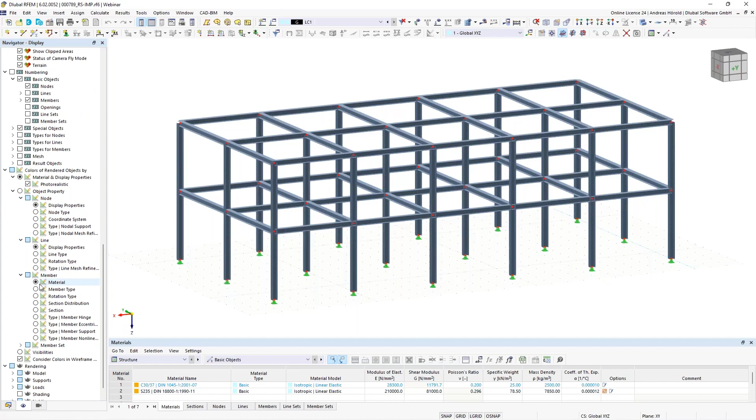We would like to display the members with different colors. I can show you the navigator display. You can use different settings here, for example the members according to member type and so on, section, and you can see there's the same color for all the same cross sections.

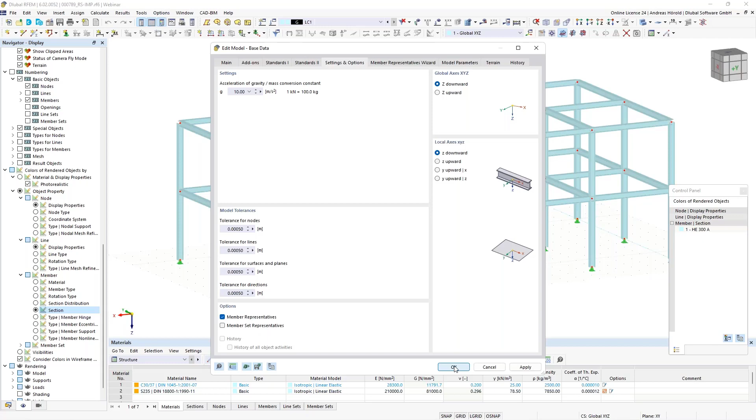I would like to show you two possibilities to show the columns and longitudinal beams and so on with different colors. At first, I start here left above with the base data, and I go to settings and options and activate the member representatives. Now you can see the different member representatives, for instance the cross beams, the longitudinal beams, and the columns.

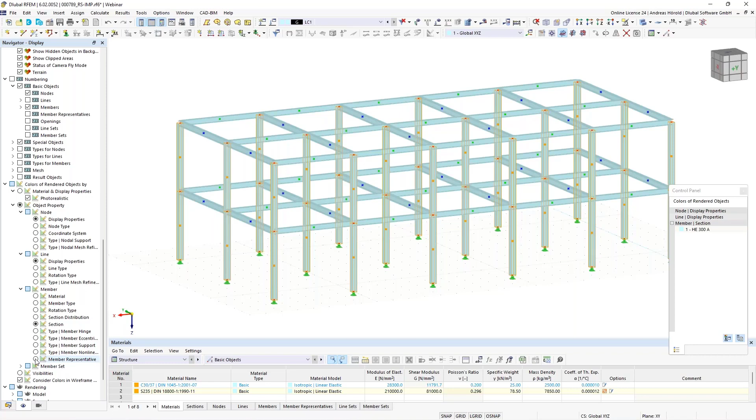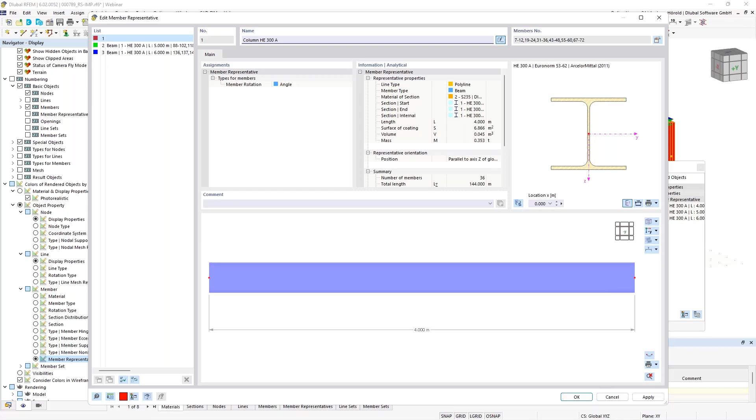You can select them here in the navigator display on the left side, member representatives, and now we have the columns and so on with different colors. It's also possible to rename them. If I click on such a member representative, I can edit the name here. For example, I call it column HE300A. And I could do that for all.

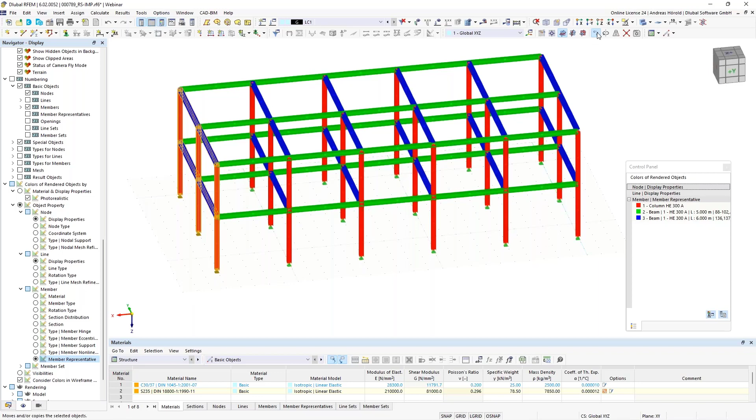So that's one possibility, but the disadvantage is it works now because all the members have different lengths. But for example, when I select those here and move them 1 meter in the X direction, then you can see those members have the same length, and that's why that option doesn't work anymore. I switch off the member representatives. I can also deselect it here, member representative, when the dots are also undisplayed.

So next possibility: I create selections, object selections. With a right click here in the navigator data, I select new object selection. First, I select the members that are parallel to a certain member. I select one member, and I call it column.

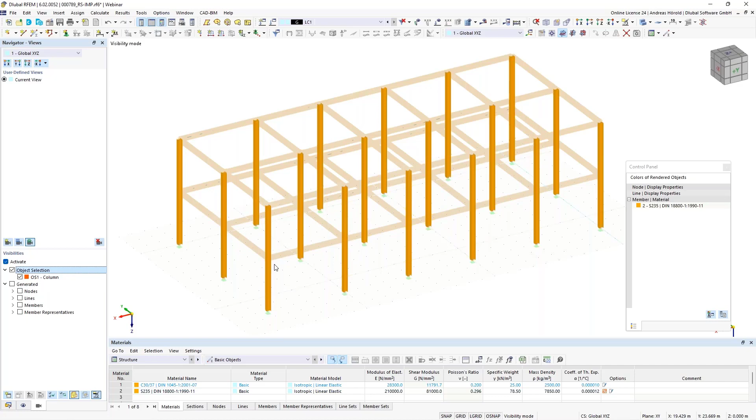And how can I display it? So, for example, that's the first selection, and you can see it also in the navigator views. So we continue with the next object selection.

I have to activate all again. So, new object selection, same workflow: members that are parallel to this member, for example, and I call it longitudinal beam.

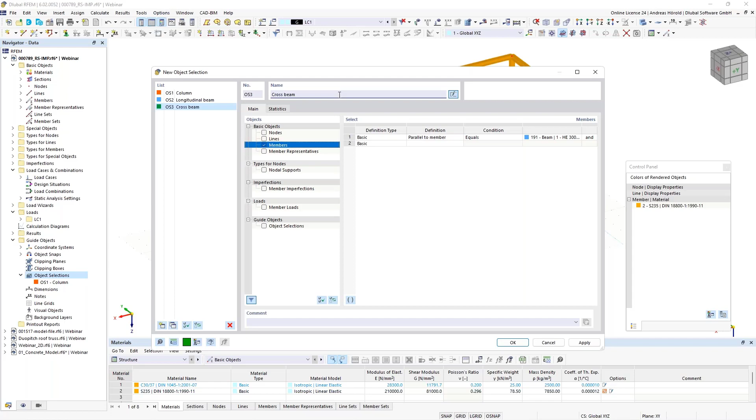Next selection, again members that are parallel to this member, and I call it cross beam.

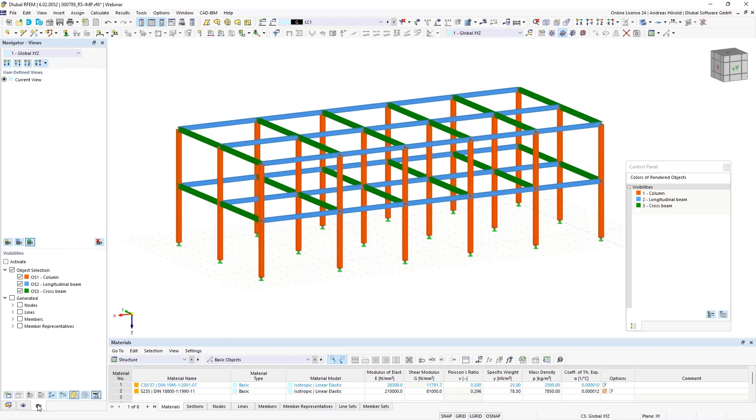So now you can switch to the navigator display, scroll down, and check here visibilities. Now we have all the members with different colors. The next advantage is you have got the views, the certain views. You can activate, for example, columns, longitudinal beams, cross beams, and so on.

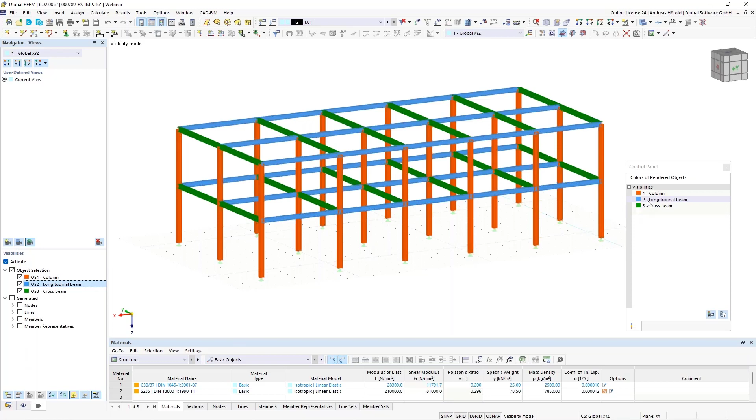You can also change the color if you want, for example yellow. I think it's a nice solution. You have got the views in the navigator views and the colors in the rendering according to the visibilities. Okay, that's all for this question.

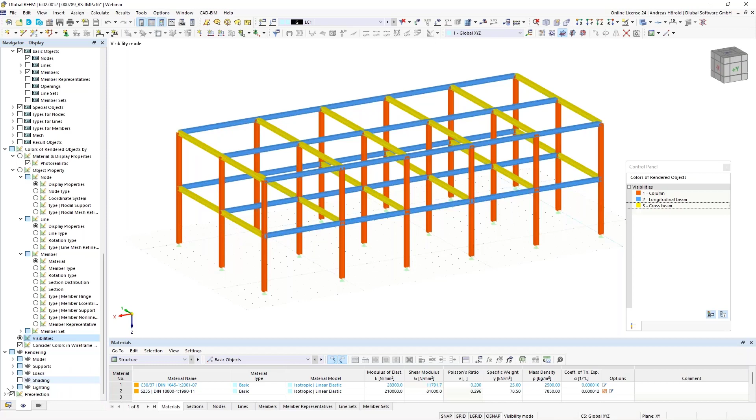We turn to the next model, a small steel hall, because the question is: where can I activate the lack of correlation in the load wizard of RSTAB 9 and RFEM 6? Now you can see this building with small height and so on. If the wind load for buildings or structures is to be determined by the simultaneous assumption of aerodynamic pressure and suction coefficients on the windward and leeward sides of the building, the correlation of the wind pressure on zones D and E of the wall surfaces may be taken into account. I would like to show that with an example.

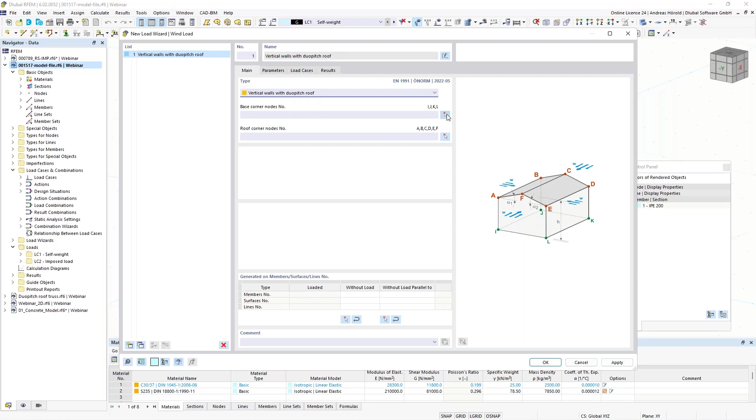I create a wind load. Here left above: insert, load wizards, wind load wizard. Now I open the dialog box. At first I select vertical walls with duopitch roof, and I have to select the base corner nodes. Now that's quite easy for that model. And the roof corner nodes.

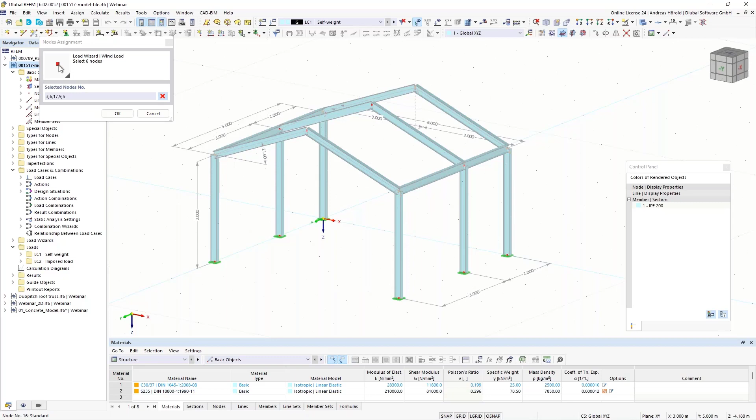Okay, so that's all. And then we turn to the parameters.

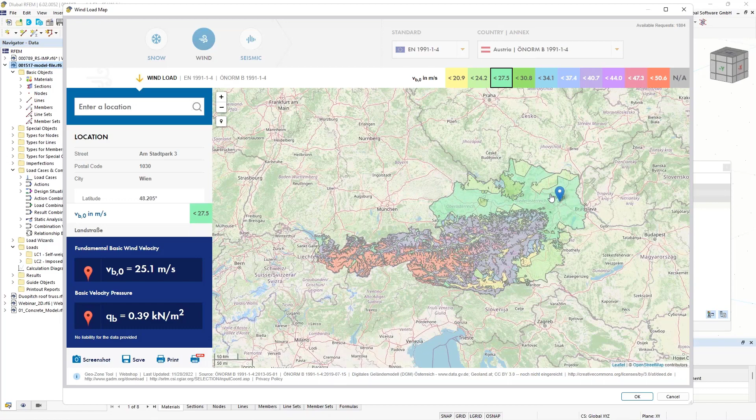I use the load maps and import the location. I selected the Eurocode and the national annex of Austria. Vienna is selected, I leave that for this example.

What is important to us is here at the bottom, the lack of correlation according to Eurocode. For buildings with an aspect ratio of height to width larger than 5, the resulting force is multiplied by 1. For buildings with a ratio smaller than 1, the resulting force may be multiplied by 0.85. Intermediate values are linearly interpolated.

So let's create a load case first, and then turn to the results. We take a look at zone D and E.

We remember the wind pressure and suction: 0.56 and 0.20. If I go back to the parameters and select the lack of correlation, the loads should be decreased. You can see it was 0.56 and it's now smaller, and also the minus wind pressure on zone E.

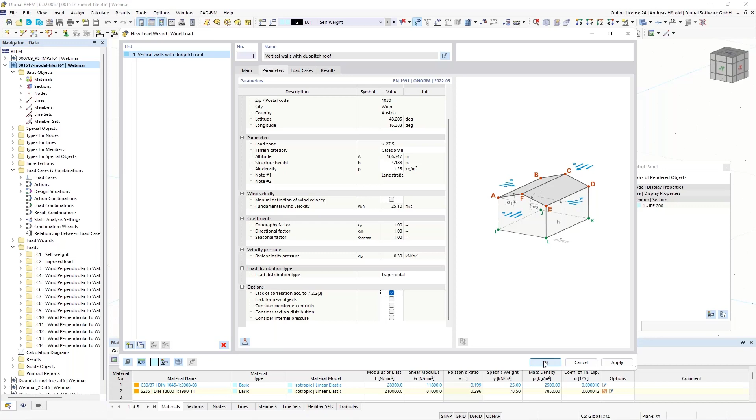Okay, then we turn to the next question. RFEM 6 crashes directly after the program start, what can be the reason? Recently, the graphics card was mostly to blame for crashes occurring after the program start or extremely slow program reaction.

I would like to show the website. That's our website, dlubal.com, and you can search for the certain FAQ under support and learning and FAQs, but I added it to our event here, news and events, webinars. That's today's webinar, you will get an email in the next days when the recording is online.

The recording will be here, and the email contains a link to that page here. Then please scroll down, you will find all models and the FAQ that I meant.

Just read the FAQ. We recommend graphic cards from NVIDIA or AMD, and we strongly advise not to use an integrated GPU, as there are often problems due to the drivers. For example, notebooks are often equipped with 2 graphic chips, such as mine.

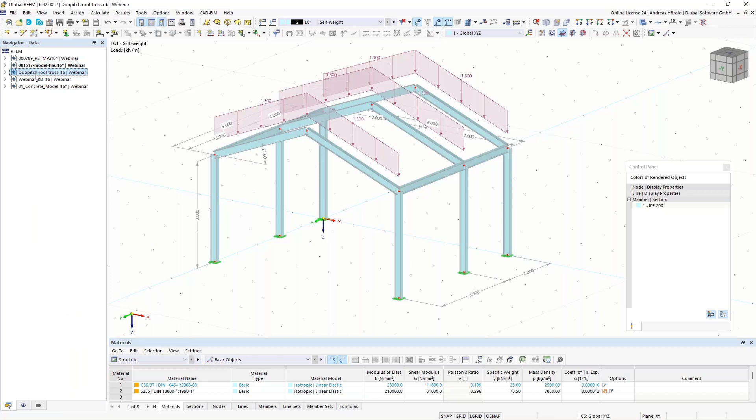We turn back to RFEM and to the next model. So the next question is: it is not possible to design double angles for my model using the steel design add-on. Every time I try it, the program shows information about the invalid section shape.

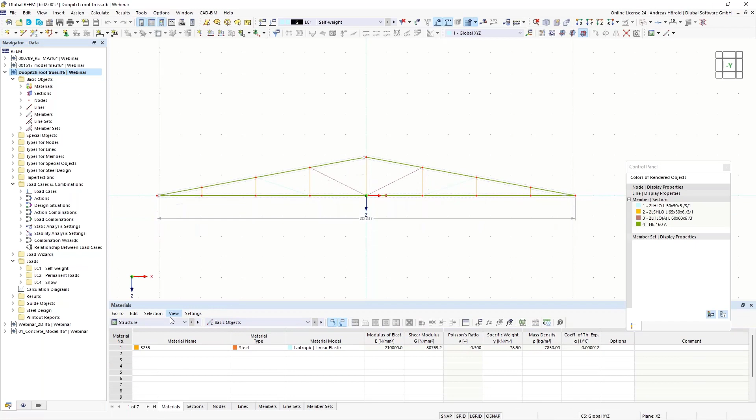Okay, let's do the steel design, so that you can see the error message. You can see that the member is not designable because of the invalid section shape for the design.

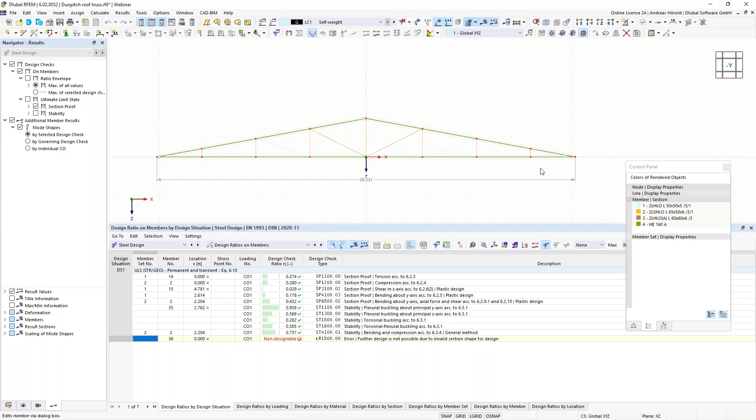So I can select the two members, then go to members, edit, and edit the section. It's a built-up steel section, and the design is not possible for the non-interacting combination type, that one.

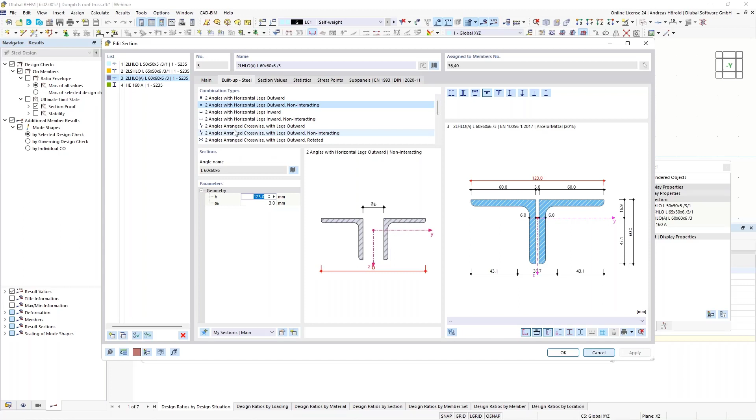But a cross-section without this property can be designed by the add-on, for example this one. And now you can see the shear. The interaction of members can be affected in RFEM by the T value. It's taken into account when calculating the shear areas and depends on the formation of the bracings.

I leave one here. I select new section, L 60 by 60 by 6. Okay, that's all, that should be sufficient.

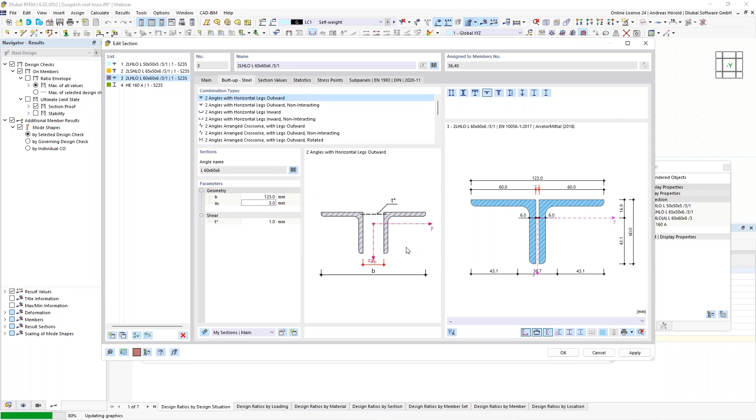I start the steel design again, and now it should work.

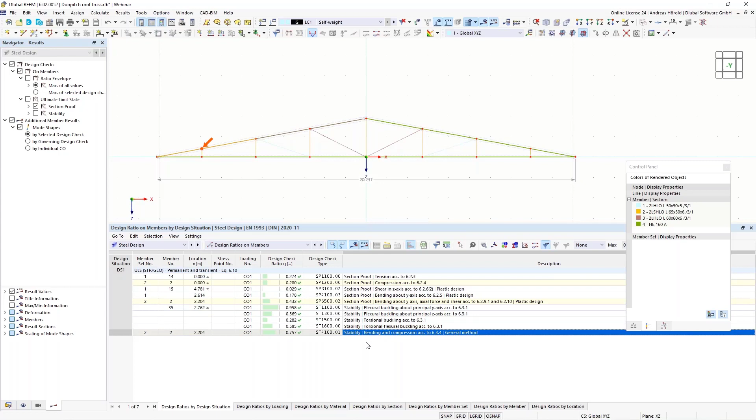Okay, now we can see the stability design. We don't get any error message, and that's why it works now, because of our changing of the cross section.

Okay, then we turn to the next model and the next question. Is it possible to display the sum of forces on a line hinge for the dimensioning of fasteners later? Yes, that's possible. We regard the dimensioning and choice of fasteners to be applied between the two surfaces.

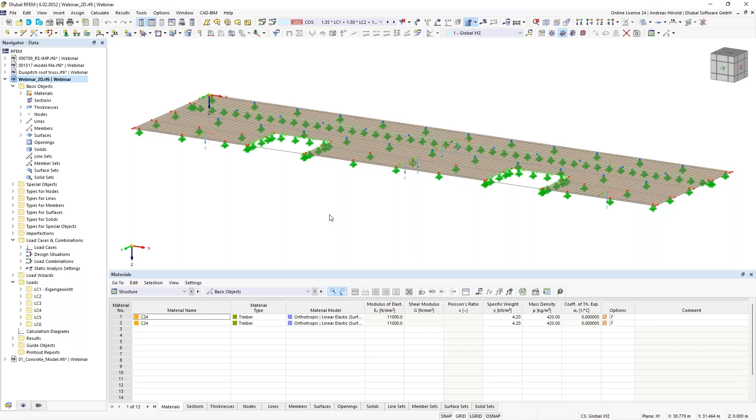It's useful to know the resulting forces or moments between these surfaces. We have got a line hinge here, we can double click on it. There are springs, a very small spring around the x-axis, and higher spring constant for the translation in x and y direction.

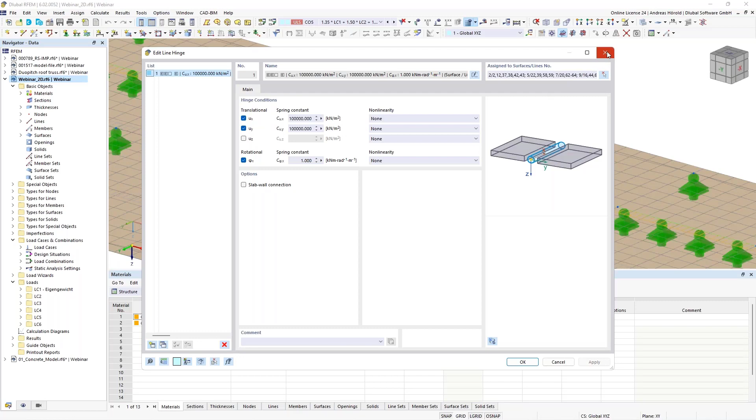So, if you want to see the results, we can do a right click and then turn to the result diagram. Then you have to scroll down, it's quite at the bottom. And then you see the releases here, line hinges, and the forces.

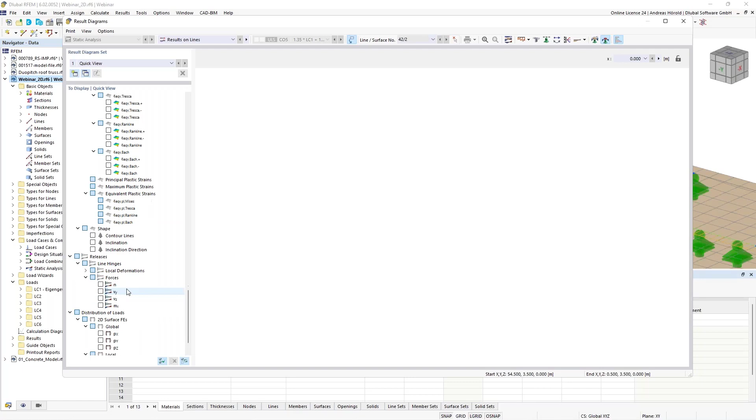What's interesting to us is vz, and is 0. Right above, with that button, you can edit smooth ranges of the result diagrams. Just click on it and you can enter certain areas, for example, from 0 to 5, 5 to 10, and 10 to 15.

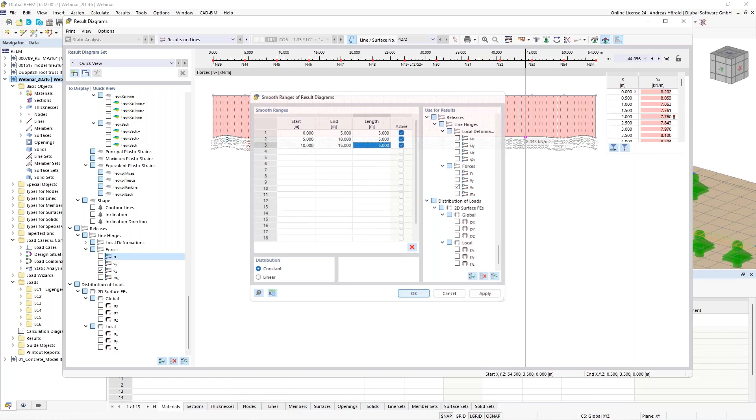If you take a look on the right side, it's automatically selected that we want to display or smooth the releases and forces vz. Now you can see the sum of that area of the 5 meters, about 40 kilonewton.

That's quite similar for our fields or areas. And the average is about 8.1 kilonewton per meter, and that would be the value for the dimensioning of your fastener.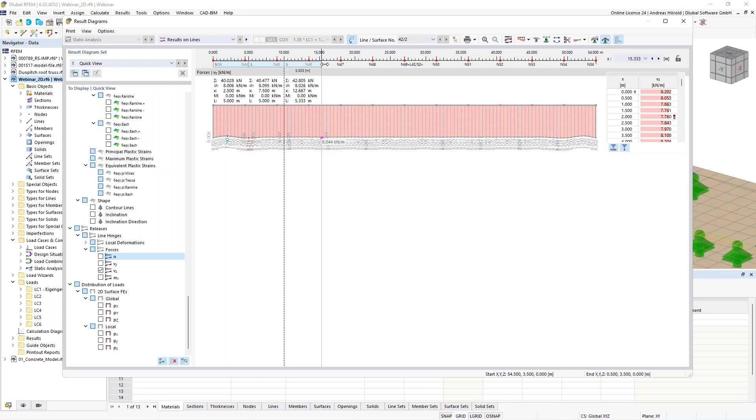You can also modify the area. You can extend it, for example, and you can see the average is nearly the same over the length of the line hinge.

It's also possible to print that directly to the printer, to the printout report, to a PDF, to the clipboard, or to a file. A file would be a PNG or JPG file. That would be possible.

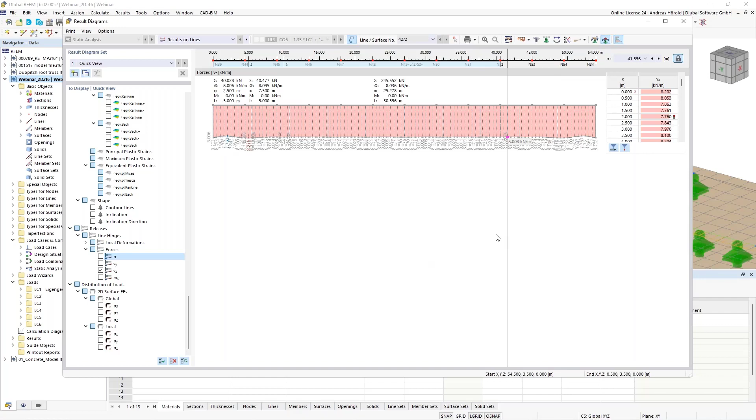Okay, that should be all to that question. Then we turn to the last model and the last question. It's about concrete design. The question is, when modeling and calculating downstand beams made of reinforced concrete in RFEM 6, is it recommended to always create member sets?

I have to say yes. At least if there are 2 or more members that act as a continuous member, then I would say modeling with member sets is recommended. We did it in that example because this is the only way to consistently determine the reinforcement for the entire structure components. It's an advantage, especially for the calculation of the anchoring lengths.

Now we've got ribs here, and for ribs, the effective width is not determined along the complete member set. In that example, one member was defined for each span. For example, we can double click on it, you can see the rib.

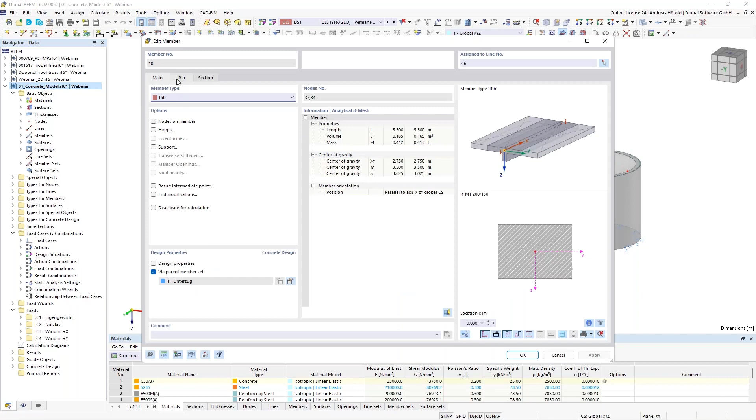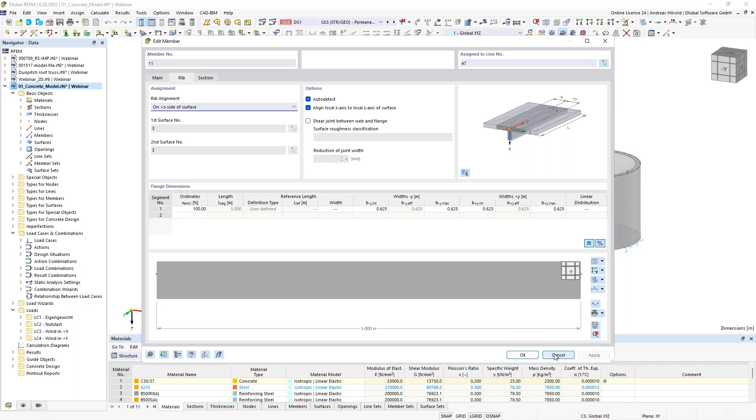You can see the flange dimension is 69 centimeters for that beam, and for that rib, it is 62 or 62.5 centimeters, because of the different span of the beam.

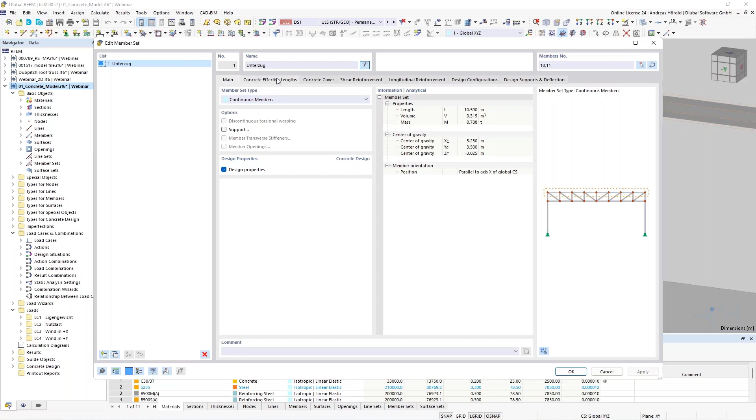And if I click on the member set here on the pointed line, then you can open that dialog. You can select the concrete effective length, concrete cover, the concrete durability - for that example it is XC1.

As a nice graphic, it's dry or permanently wet in our example. Then the shear reinforcement - it's possible to define several reinforcement areas without effort on the member sets. This way the shear reinforcement can be quickly defined.

For example, above the center walls, in the middle, by smaller spacings or different rebar diameter. You can see the spacing is 10 centimeters and the diameter is 14 in that area here.

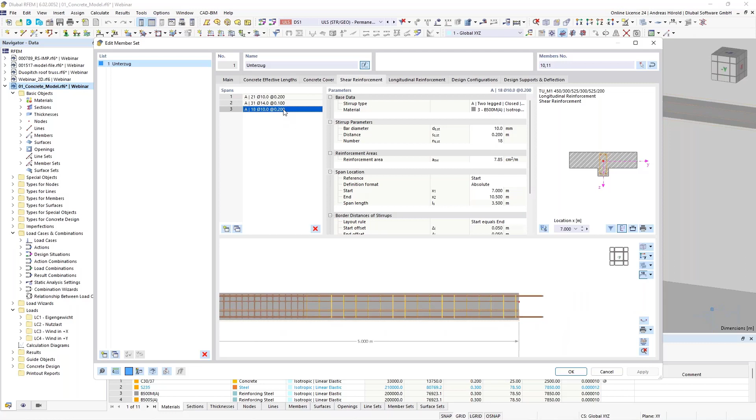And here we have a larger span or distance between the stirrups also here. So then the longitudinal reinforcement is continuous, also over the supporting here. Then you can see the anchoring lengths and so on.

And it would be also possible to design supports for the deflection analysis.

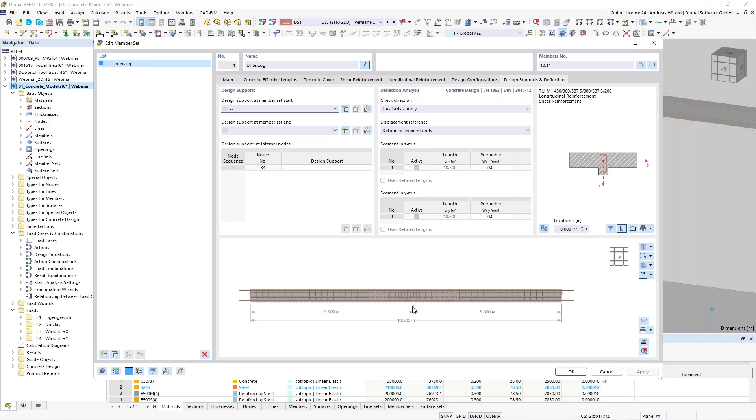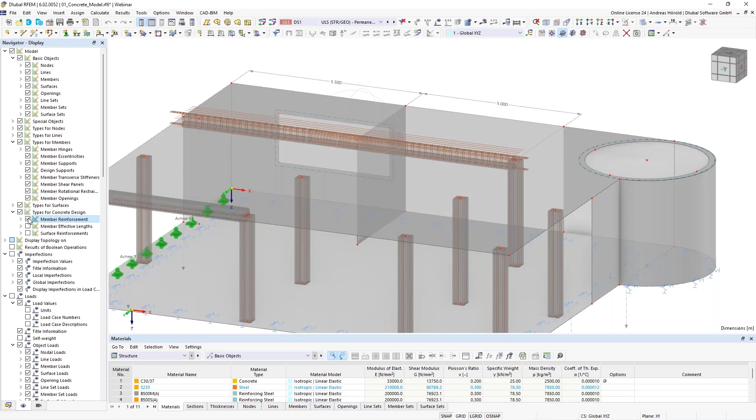And if I applied it, I can also let the program display the reinforcement. In the navigator display, you can search for the type for concrete design, the member reinforcement, and the surface reinforcement. And that's the reinforcement of the member set that we recommend to define.